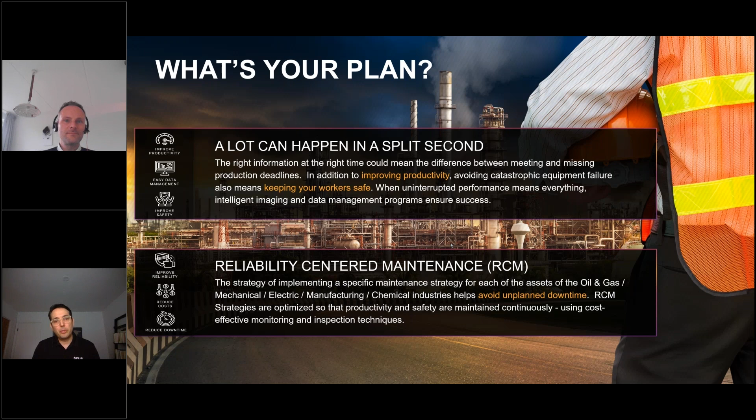The first thing I want to share with you is a documented survey that RS did recently, early this year, called Performance in Focus, about the 2024 Maintenance Engineering Report. I just extracted some key elements here. The first thing, as you can see, is what are the biggest drivers for unscheduled plant downtime? Starting from the left, aging assets is the biggest contributor. Then you see mechanical failure. Obviously, as you need to replace products, you have to deal with the lead time of those replacement products, so that was also a significant problem when it came to downtime. Operator error at 11%, and then lack of skills at 7%.

So when we asked this large group of people what they plan on doing to decrease unscheduled downtime in their plants, there were three things that stood out. One was upgrading the equipment. Number two, at the same percentage, both at 49%, was improved training—getting people the training they need to do their jobs. But most importantly, introducing some sort of preventative maintenance strategy, which in many cases they didn't have.

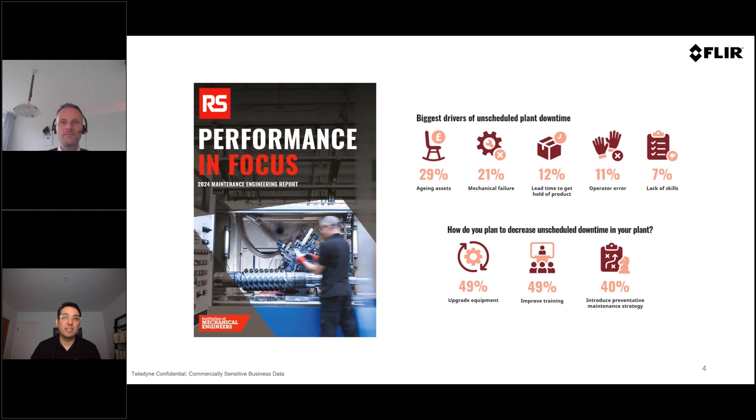Many of you have seen what we refer to as the PF curve. You have your proactive domain on the far left, and then you get into predictive, with all the different technologies that can help you there. Then you have the reactive domain—the moment you see smoke, the moment you can smell that something's burning, you have to move really fast. As you get closer to the point of failure, you have a shorter interval and have to increase the frequency of inspection. So ideally we all want to be in the proactive domain, but we need to have a system and a strategy in place to deal with the predictive and reactive domains as well.

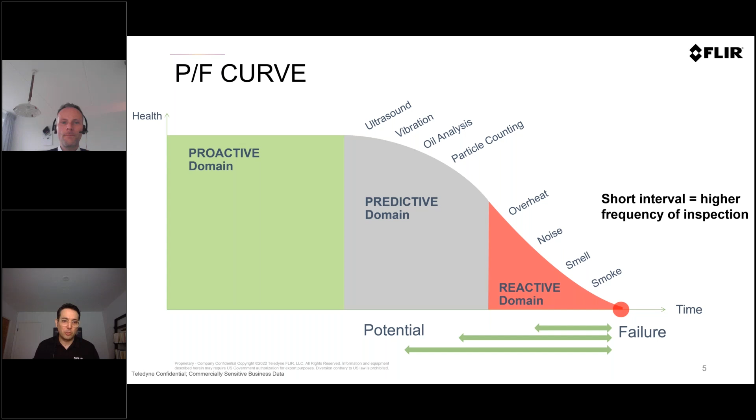Let me talk to you about some interesting application stories, case studies of how companies that implemented these types of programs have saved a lot of money. This particular one is a steel mill. By introducing IR, they were able to reduce the time needed to do those inspections from 30 minutes down to 5, resulting in 25,000 euro savings. This is just the steel mill.

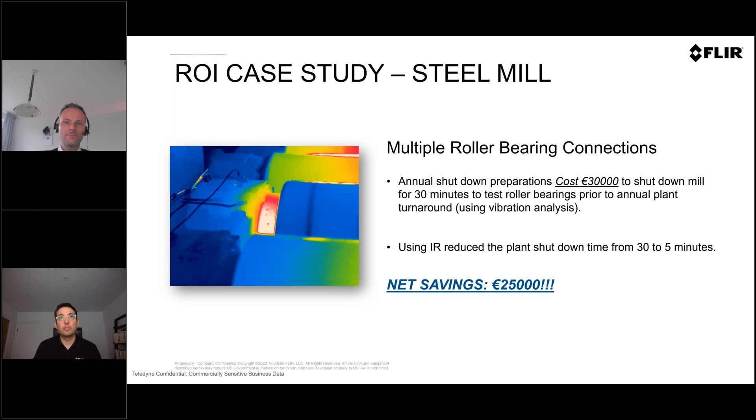If you look at this particular hospital, they have 800 steam traps. Energy efficiency and energy usage is a big concern in hospitals. By being able to inspect and troubleshoot these steam traps, they could save anywhere from 100,000 to 300,000 euros a year.

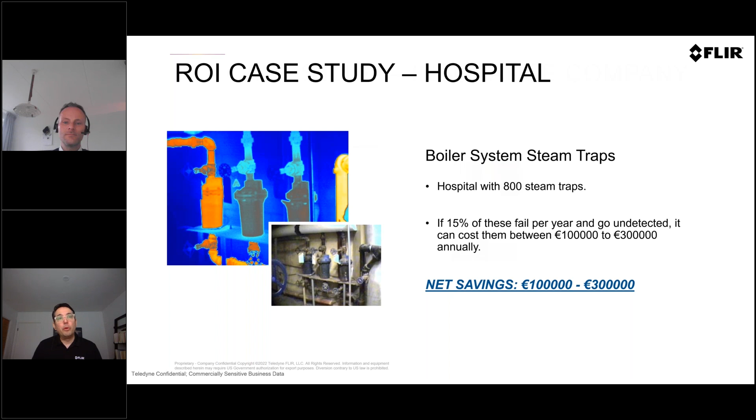Let's get a little bit into the science of thermal imaging. We've heard the phrase a picture's worth 1,000 words. Let's put that to the test here with infrared technology.

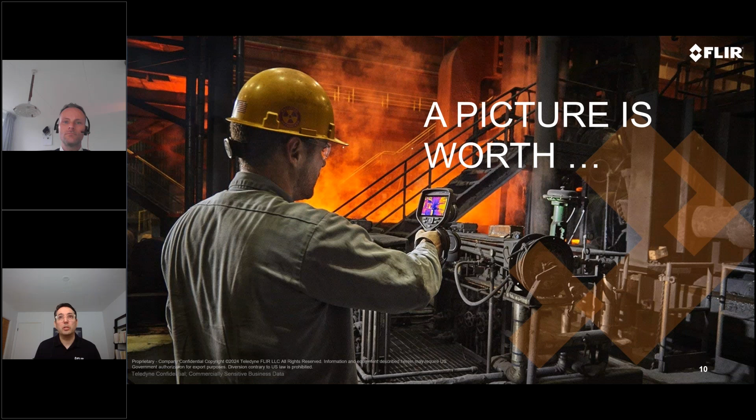We've all seen the spot thermometer - IR thermometer, IR gun, spot radiometer, laser thermometer, many different names for this type of product that allows you to scan the surface and it gives you one temperature reading. It's the average of everything it sees at that distance. At short distances it works really well, and they're relatively low priced, although at higher performance and higher temperature ranges they can be very pricey. It's a technology that's been used for many years, but it's a single spot measurement - it measures one spot.

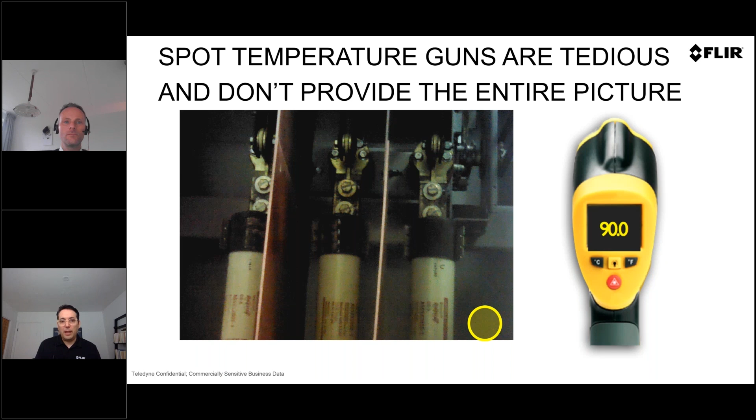When you're scanning your target, you're basically not looking at every single place within it - you're scanning trying to guess where the problem is, and it's a bit of guesswork. Maybe you'll hit the right spot, maybe you miss it altogether. But when you have an infrared camera, that's when you see the full image - a picture worth 1,000 words. You can draw boxes, areas of interest, the highest temperature spot, lowest - you can do a lot of different things once you have that thermal image.

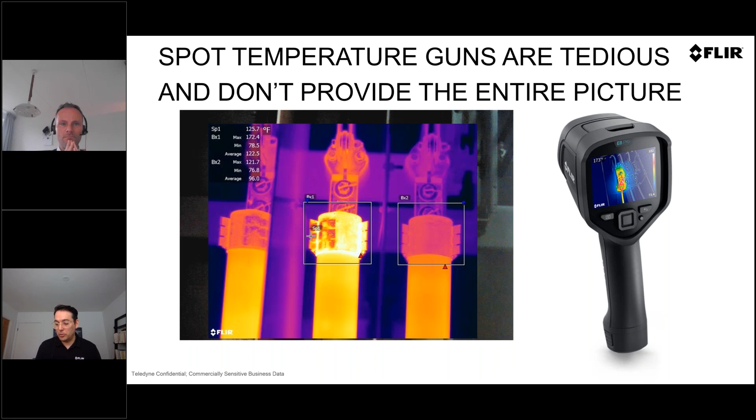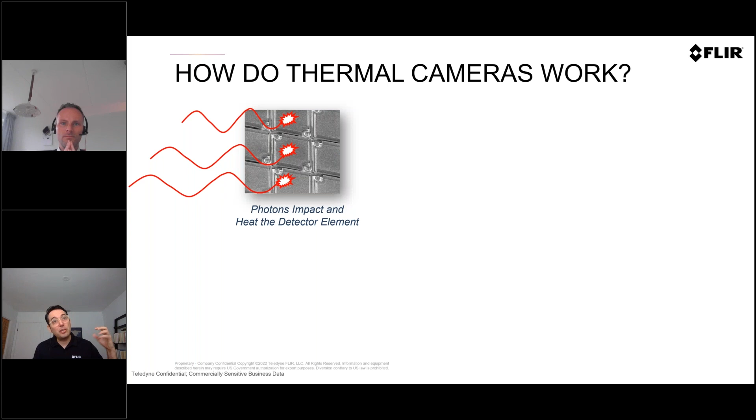This is a thermal image - not the actual image, but the data behind those images. Think of an infrared camera as thousands and thousands of those infrared thermometers. You still get that data for each of those measurement spots, but what we do is take all that data and turn it into an image that's actionable. Here's how that works: the infrared radiation hits the detector, then there's a lot of calculations that happen inside the camera. We assign temperature values to each of those pixels, and from those values we can create an image that's more actionable and easier to work with, easier to add to a report, easier to share with our colleagues.

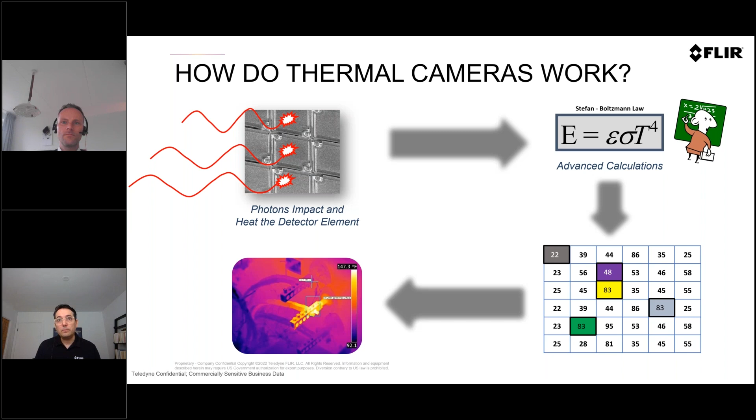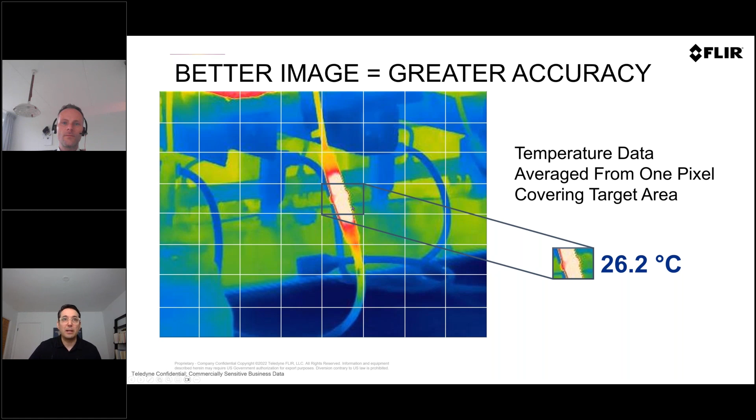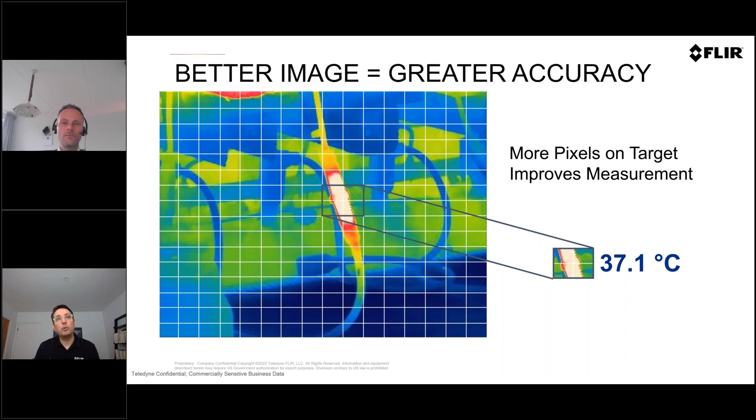Let's talk about pixels for a second. If you look at the thermal image as it relates to accuracy, with 1 pixel you can see the hotspot in a rectangle - the camera is measuring 26.2 degrees Celsius, which is the average of all the measurements inside that pixel. Now with 4 pixels on target, you get a bit more accurate because you're able to measure a smaller target, so now you're at 37.1. But the moment you get a 3x3, you get 9 pixels on target, and now you see the real temperature is 48.5 degrees. So resolution matters - resolution drives accuracy.

Understanding these basic principles - being able to understand the distance, what kind of optics I need, what kind of resolution I need for my application - is really, really important.

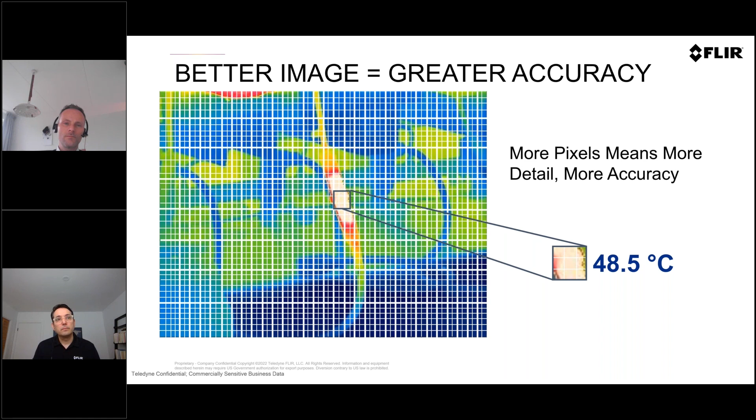As a recap, I'm sure you've all seen many different applications for thermal, but I wanted to give you a quick overview. When you look at electrical, there's a high number of places where you can deploy thermal in your facility. Many, many different applications.

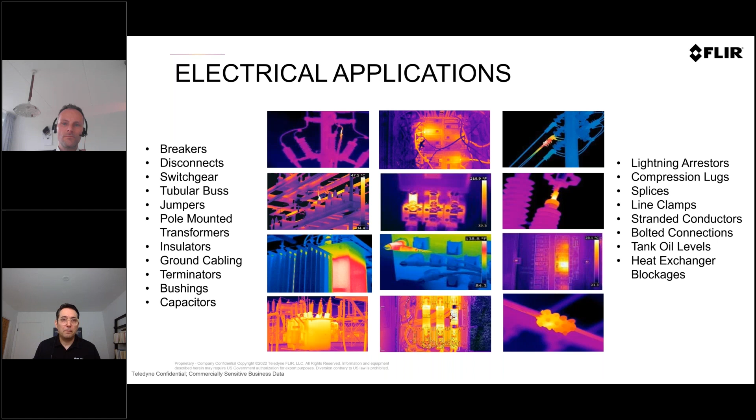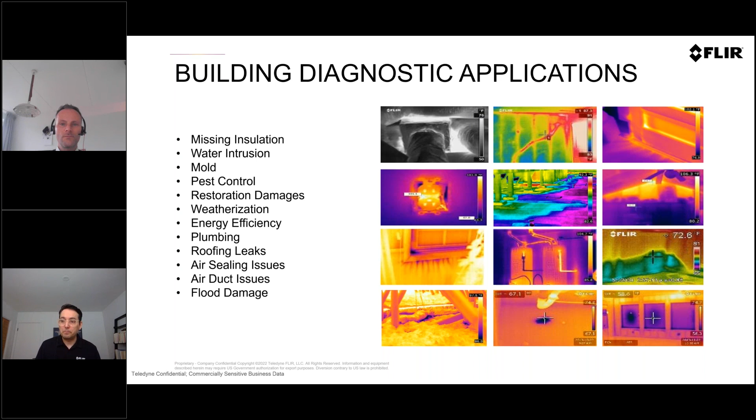There's also many different applications in mechanical systems, and in what we call building diagnostics, finding air leaks, energy efficiency problems, finding roof leaks or any sort of damage from rain or flood. And then there's a wide number of other applications, whether it's perimeter security, disease control, environmental research and development, even agriculture, we're able to use thermal imaging.

So many, many different applications. When you're investing in this technology, you'll be able to use it for many different things. So the ROI is always going to be there.

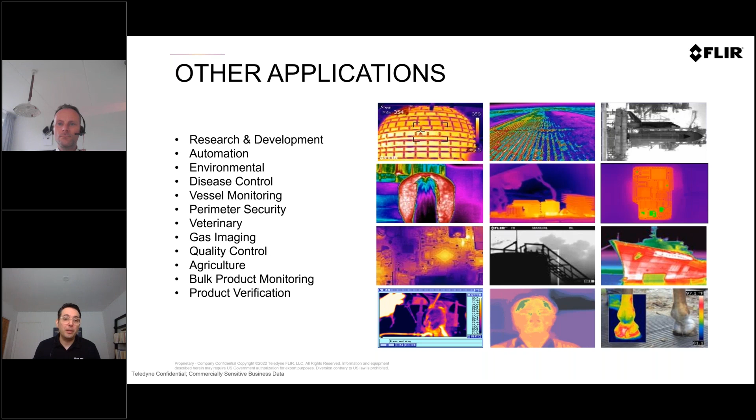So I invite you to visit the RS website and look through this selector tool to help guide you. And we're always available, the RS team and the FLIR team, to help you find the right solution for your application. It's not just about the camera, but all the different tools you could use in a predictive maintenance program.

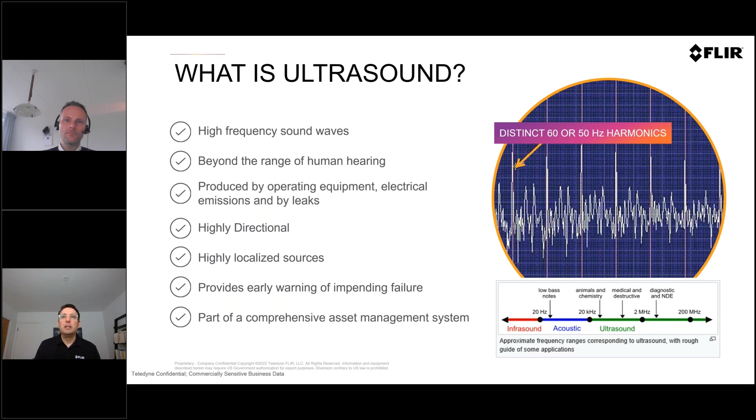So this is ultrasound. Let's talk about the analogy to the spot thermometer. We've had single microphone products in the market for a long time. Those require interpretation - you're not seeing an image, you're just getting information from a single microphone on the screen, so you have to interpret that data. There's also accessories that you need for specific use cases.

You can now work 90% faster, and this is so easy to use - it's like using a camera. Just scan and you'll see it right on the screen. And it's not just about scanning, it's about documenting the potential problem.

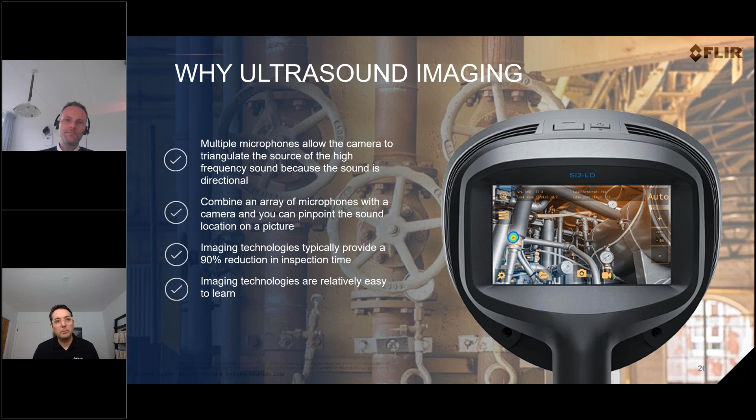What are the different applications for ultrasound? We have, for example, partial discharge, compressed air systems, vacuum leak detection - basically any compressed gas, you'll be able to find leaks. In product design, you can see the many different applications for ultrasound imaging.

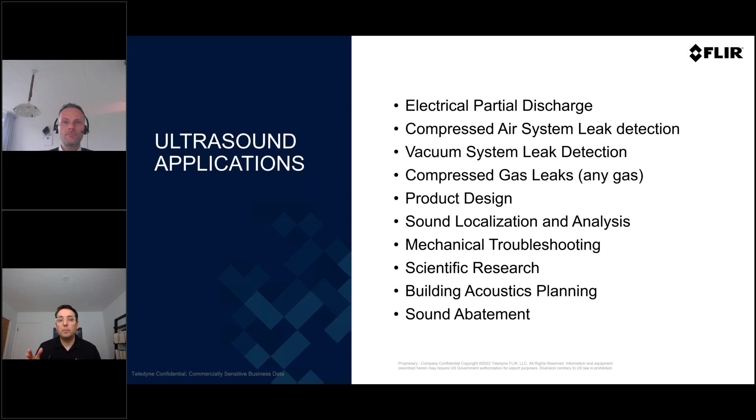As far as how to choose the right camera, we have models for partial discharge—you see the dash PD. We have models for leak detection, and the Pro unit does both, so you can do both partial discharge and leak detection with a single camera. There's also an Si2x for hazardous environments, a very new addition to our portfolio.

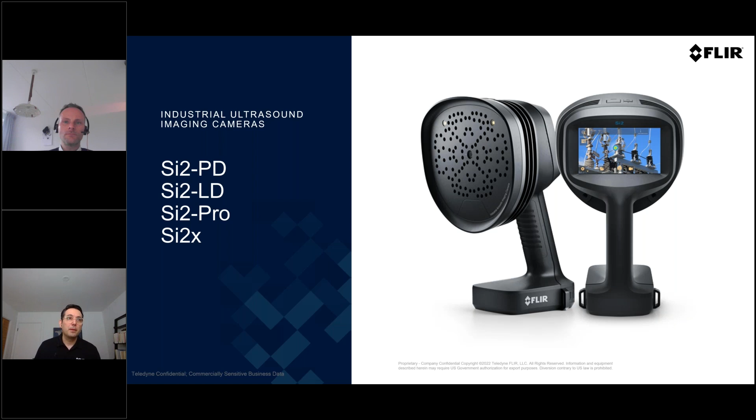So how does it find partial discharge? When you have this type of situation and create this corona effect, the camera is able to see it and note it right on the screen. Not only that, the camera can quantify and give you an idea of classification of what kind of partial discharge it is. So you get a lot more context, not just the image, but the severity of the situation—very important in substations.

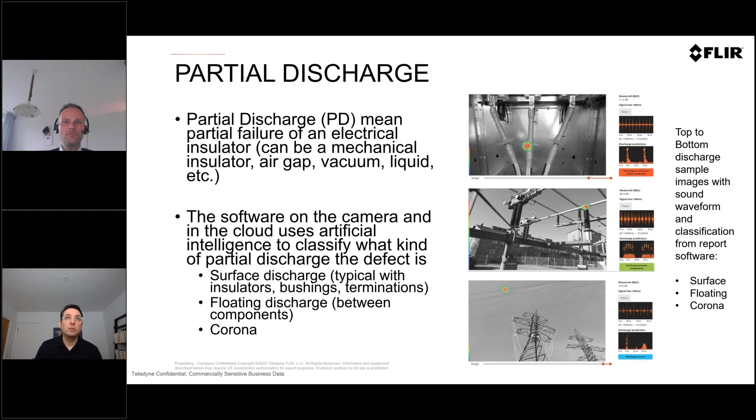There's also leaks. Anything that's pressurized is going to create turbulence, and that creates ultrasonic sound waves. It's very easy, as you can see here on the screen, to find where that pressurized air or gas is leaking into the environment. Being able to find it is quite easy with an ultrasonic imaging camera.

You can see in the screen above a compressed air system leak—you can very clearly see it. And this one shows a refrigerant gas leak as well. So again, it's quite easy to scan, find the problem, and document it.

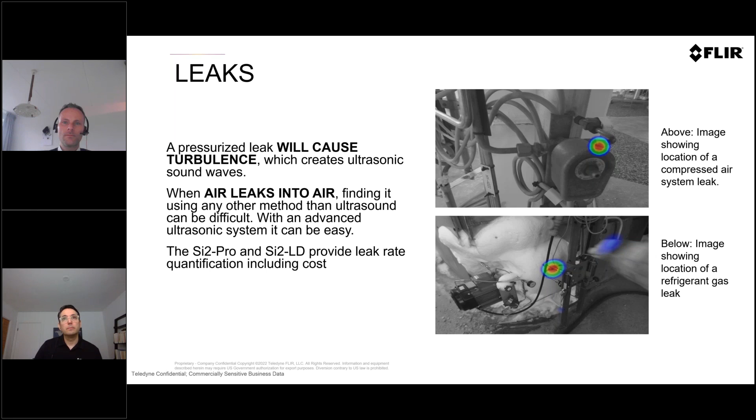Quick summary on ultrasound: it's very effective and used in many different applications, whether it's partial discharge or leaks. It's quite simple to use, and because it's imaging and gives you full context of what you're looking at, it's much faster. There's the frequency in which it operates, and as you have more microphones, you can detect better. And there's severity assessment and quantification, being able to use software along with the camera.

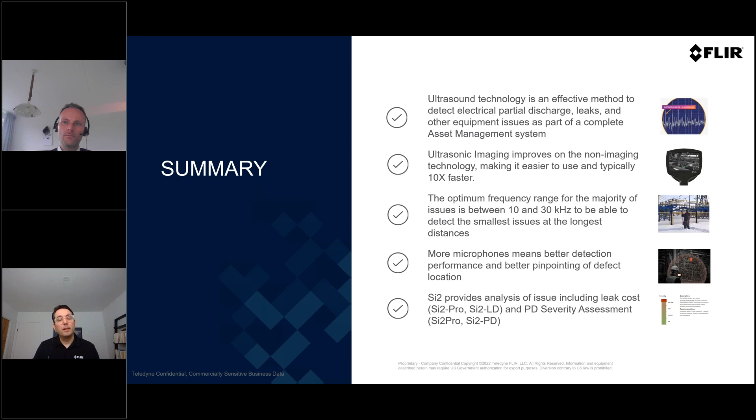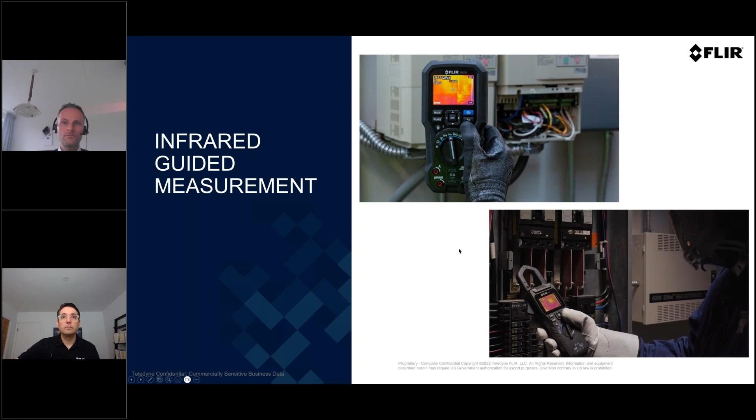In some cases, the electrical equipment is behind a cabinet or a door. Being able to inspect these cabinets, if you don't have infrared windows, can be quite complex—there's a certain level of protective equipment needed. Opening that door creates an opening for oxygen, which could lead to arc flash. But with infrared windows, you can have this on the door and do your thermal and visual inspections from a safe distance, without de-energizing or opening that cabinet door.

So I wanted to share that even when certain pieces of equipment are not readily accessible, there is an option through infrared windows to inspect them on a regular cadence.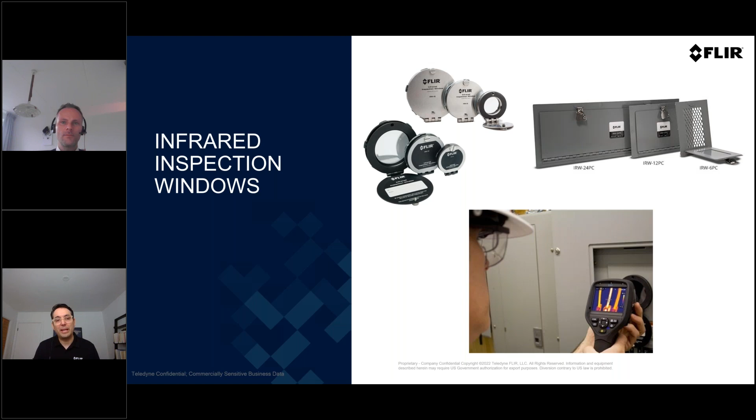Last but not least, software. We're capturing images, data, and measurements, and we want to keep track of the trends—is something getting worse, how much worse is it getting, who needs to know about this information, who needs to act on some of these findings? So whether you want to use a specific software for IR, or integrate infrared and other technologies into your system, FLIR RS can help you.

So software should be considered when you're integrating, when you're setting up a predictive maintenance program. So think of what is the right software package for you. How do you want to integrate into your existing systems?

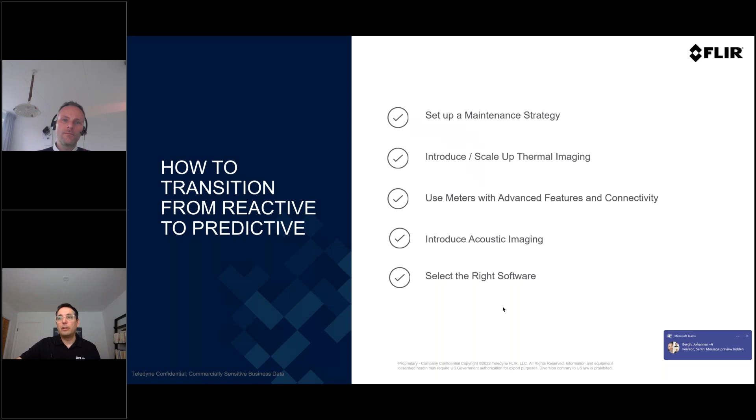So now we have time for some questions. I hope you've been able to type some of those questions. Peter, do we have any questions?